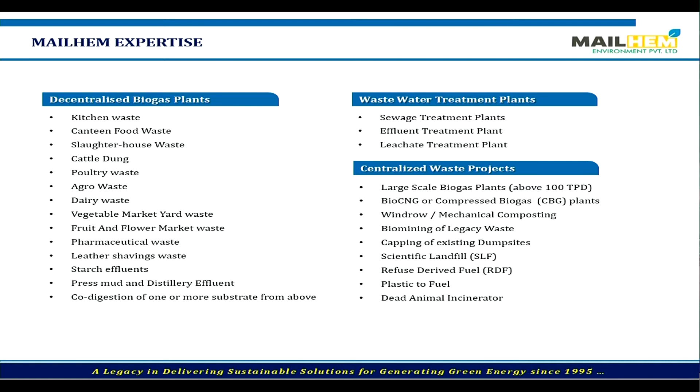Now you can see the topic is about biogas. So we can set up biogas projects in a decentralized fashion on a lot of substrates. I think you name the substrate and I'm sure we have a plant on that particular substrate - dairy, distillery, sugar, starch, vegetable, fruits and market waste - anything, this is very easily done. Not a problem, not a challenge for us.

You might even see leather waste - yes, ladies and gentlemen, even leather waste can be converted into biogas. Then, of course, you have the liquid waste, you have leachate, you have effluents, you have sludge. All this can be converted into biogas. And then we do large-scale biogas projects, more than 100 tons per day.

Then you have composting - there's another method of organic waste management. You have RDF and waste to energy, which is handling your dry waste. So lots of things can be done.

We must have done something right in our last 26 years for Prime Minister Modi to give us the Garbage Guru Award, and some other notable Quality Council of India Award, Lifetime Achievement Award and stuff like that. This one's my favorite - this one was from IBA itself for operational excellence. So that's something which is our specialty, operating the plants. If you don't want to operate a plant, don't build it. That's our logic.

We have more than 350 projects all across India. Now I'm talking about a particular scale. We all know about the municipal ward level, where a population of about 75,000 to 1 lakh is generating a lot of waste.

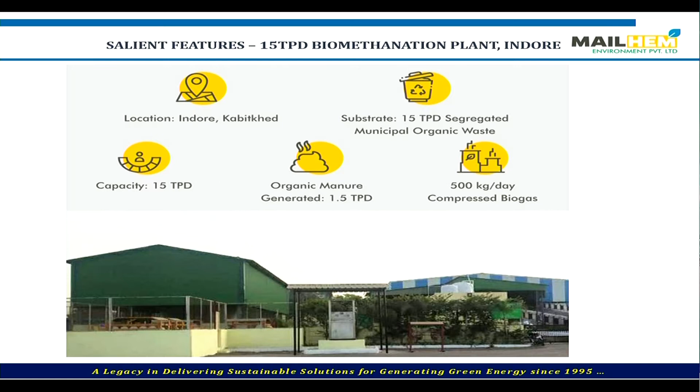So this project, which we did for Indore Smart City, is a mini bio-CNG project with its own dispensing station. It takes care of 15 tons per day of organic municipal waste, which comes at the transfer station. We convert that into biogas, purify it, clean it, convert that into bio-CNG, and we have our own dispensing station where we are able to fill Indore buses.

This project has been in operation for the last 4 years. You're welcome to go and see it - it's your taxes at work. It's a government project, go anytime, no problem. This is in Kabitkhed.

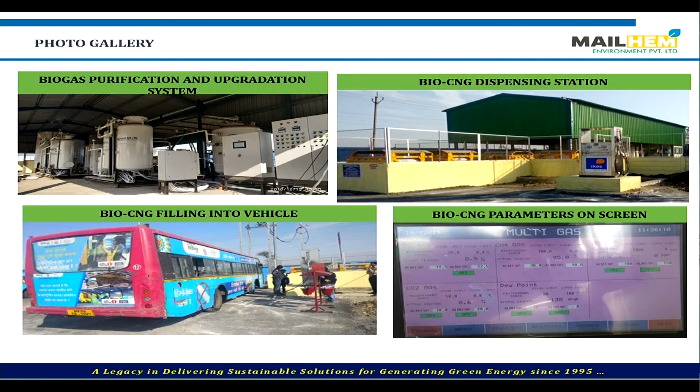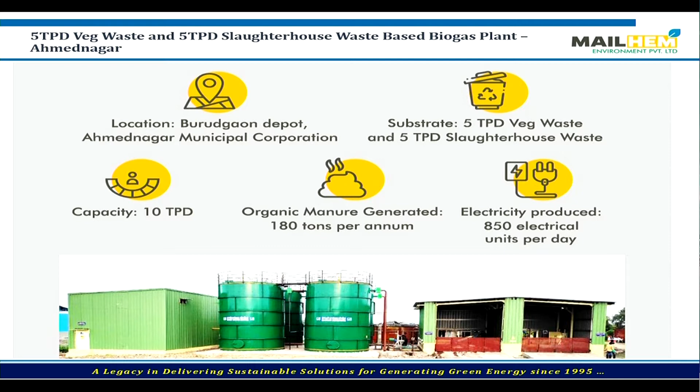Another government project we did addresses a big pain point for all of us - the chicken and mutton shops, slaughterhouse projects, pig slaughter and everything. This creates a major disposal problem for the government. So this is a slaughterhouse waste-based project in Ahmednagar city, where 5 tons of slaughterhouse waste and 5 tons of vegetable waste are combined, treated, converted into biogas, and used for heating and electricity generation at the waste dump yard. It has really improved the aesthetics of the waste dump yard there.

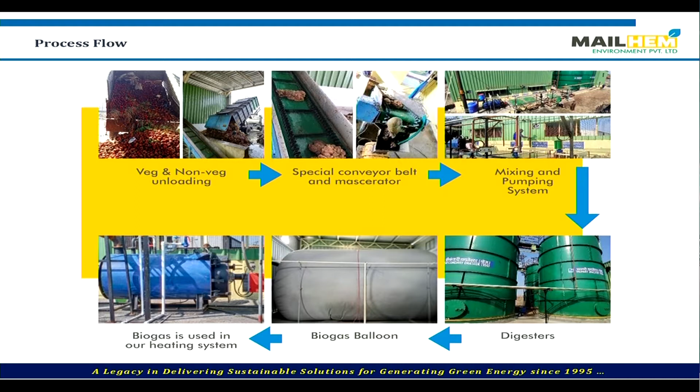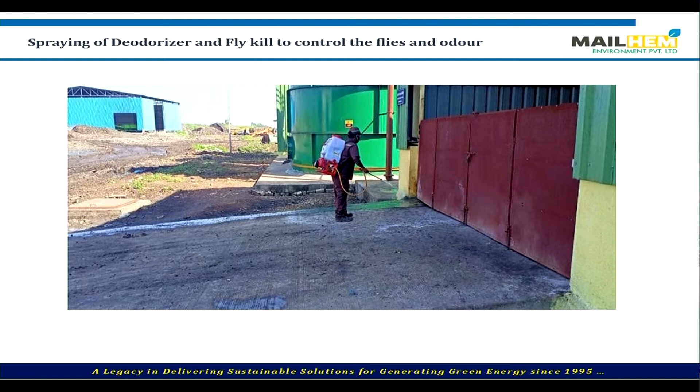Now, what about the smell? Slaughterhouse - I'm talking of blood, paunch contents - oh my God, it can give people a headache. But why biogas? Because once this material gets into the biodigester, there is no smell, there are no flies. And to ensure double precautions, you even have an auto spraying system, as you can see. This project was appreciated even by Central Pollution Control Board officers, who mentioned this is the ideal way to treat this type of waste.

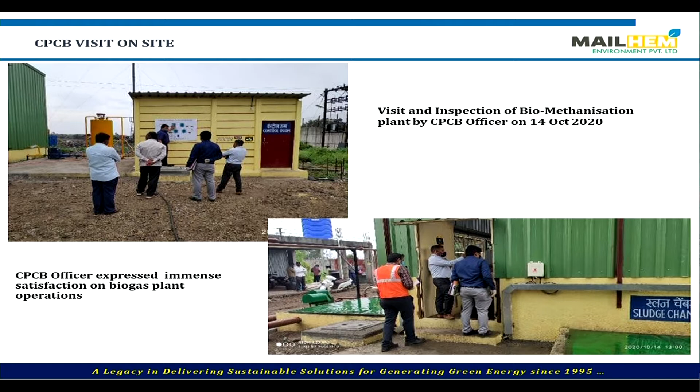So you see, I'm trying to solve government problems at different levels. Stinking wet waste - the smell comes from stinking wet waste at different levels. Once it gets into a biogas plant, it becomes totally eco-friendly. You have a very compact footprint, meaning you're not consuming a lot of space. You get biogas, which as previous speakers mentioned can be converted to cooking fuel, heating, electricity, even bio-CNG these days. And then the liquid fertilizer and solid manure that you get sells very well.

In my 22 years of experience, though we call it a biogas plant - and I'm thankful to Shuklaji for naming it BGFP, biogas fertilizer plant - there is more stress, more importance given to fertilizer than the biogas. We get questions about why the Satat rate should be 46 and why not more, things like this - all okay. But the actual paisa is in the fertilizer, because we are an agro-based economy. So fertilizer is also the way to go.

Don't leave that out. These plants can be semi-automatic or fully automatic. We give a social impact by employing a lot of local people around. If you have a project in Tamil Nadu, you're going to have Tamilian people, local guys operating that plant, and normally we prefer even ladies, self-help groups. That's how you have a social impact for this kind of project.

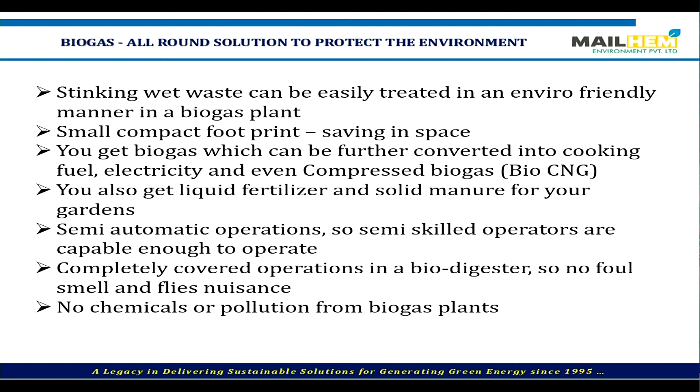At a different scale, when you have to scale up, these are some bigger projects we are doing. This is a project for Rudrapur city, handling city garbage, city waste. Rudrapur has a 50 ton per day compressed biogas project with its own dispensing station and a tie-up with IOCL Adani. So you see, we are doing both, and here city waste gets handled.

A similar project is for Bhopal. Municipal organic fraction of Bhopal city, 200 tons per day from the vegetable market, fruit markets and everything, is getting treated into a CNG project where buses for Bhopal will be filled up at 5 rupees less than the commercial market rate, but not lower than the Satat rate. All these projects are 25 and 30-year projects.

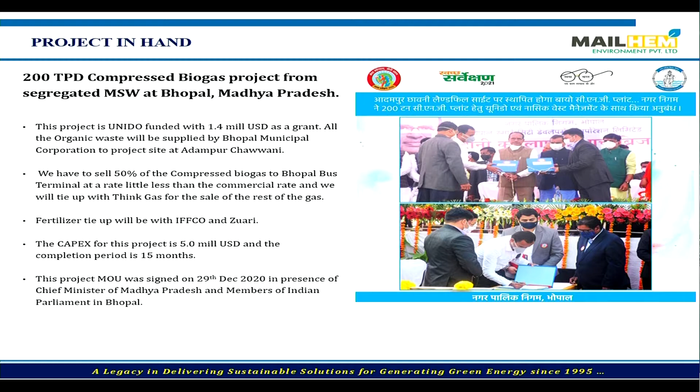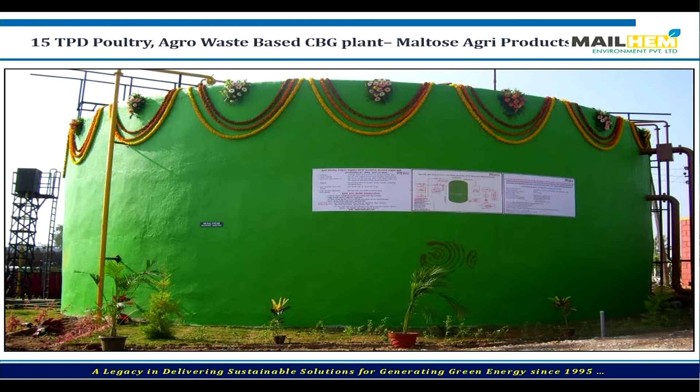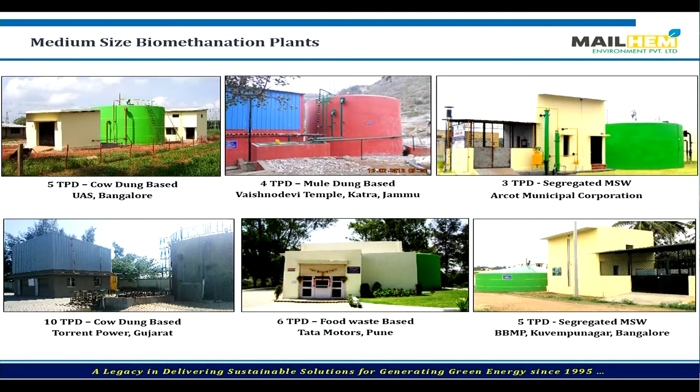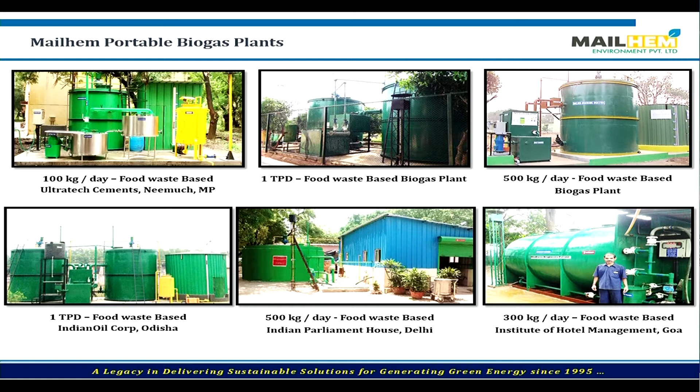So you see different scales - these are agro-based projects, potato and food processing projects, all converting to CNG. This is dairy and poultry combination, pure poultry and egg industries, and some organic fraction of municipal solid waste. You can make it even smaller - this is for housing societies also. So you see, biogas is all encompassing. Thank you so much.

Thanks a lot for giving the insight. I mean, something you need to really notice.

He talked about that if you can't run a biogas plant, rather not put it up. There is a saying that installing a biogas plant is one thing, running it is another. I heard a saying that in the Vedas it's written you don't donate a cow to a poor Brahmin. I was literally confused why you don't do that. The reason is very simple - that guy will not be able to take care of that cow. So in fact you are committing more sin than merit.

Biogas plant, as a matter of fact, it's like a cow's stomach, nothing else, right? A cow, when it burps, it emits almost 250 to 400 liters of biogas every day into the atmosphere. So you need to be very sure from the operation and maintenance point of view. It should not happen that you are creating another negative impact by simply releasing the biogas into the atmosphere because your system is not leak proof. Then again this odor problem will come, what he was talking about.

It has to be properly packed, etc. And odor is something you can definitely take care of, and that's something biogas can really proudly talk about in general.

Thirdly, what I really liked was the fact, and that's what we are always emphasizing, SATAT is giving confidence from the market or investor perspective. If you see the whole value chain, the last part is the market introduction of the gas and the fertilizer. This market introduction part is taken care of by SATAT. SATAT is not doing any favor as such - if you can sell the gas in the open market at a better rate, do that, don't worry about it. SATAT is giving confidence that OMCs are going to buy all your bio-CNG, whatsoever you produce. And that is something that was needed.

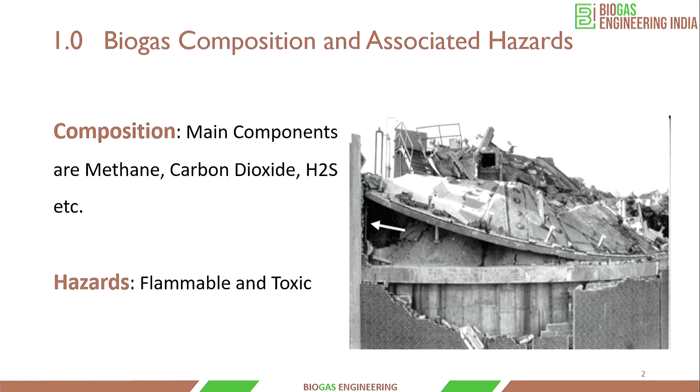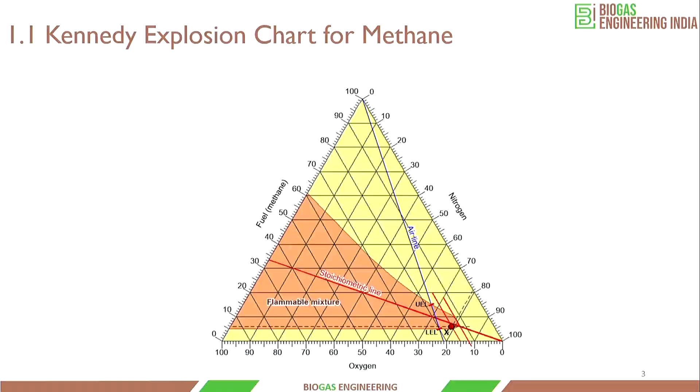To demonstrate that, I'll show you this graph. When methane is present in excess air or exposed to atmosphere, and the concentration is between 5% to 15%, it forms an explosive mixture. So what we are dealing with is an explosive gas, and unfortunately, personally I feel the attention that it needs, the biogas sector, that attention is not there. As we are growing, safety has to be an integrated part of the system. This chart demonstrates that biogas is in a flammable range when leaked, at concentrations between 5 to 15%, which is always available in a biogas plant.

Another aspect is hydrogen sulfide, which is very toxic. I'm not sure how many of you know that, but when the concentration is about 1,000 ppm, it causes instant death. These are some inherent properties of the biogas. Nothing to worry about—if you're dealing with any energy source, these are inherent properties, and they are going to be there.

But there are ways to mitigate that, how to follow good engineering practice to make the difference and provide a safe plant. That's what these properties demonstrate.

Now, what are the facts? Between 2003 to 2009, there have been 13 deaths because of explosion or some kind of exposure. The major causes were explosion, commissioning, material certification, maintenance, and H2S exposure.

So now we know the challenges with biogas, and we know accidents have happened. So what can we do about that? That's where engineering solutions come into the picture. Taking this risk into account, we design a system which is safe and follows all regulation.

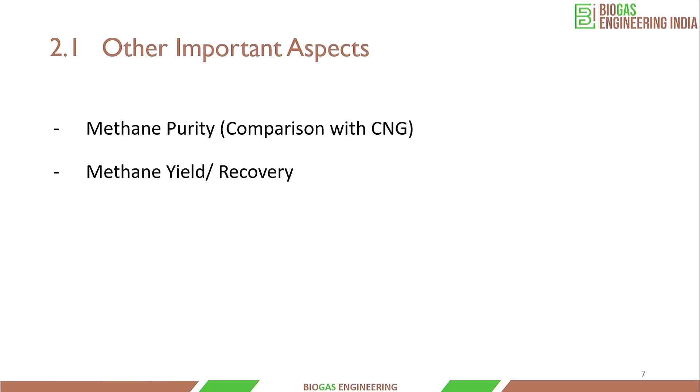Our intention is to replace CNG with biogas. So basically, if we target to meet at least 96%, that's something I feel would be very good, and relatively the consumer won't feel that much difference. That will also make a difference.

Methane recovery—when I say methane recovery, it's about what is the energy content in the feed and how much we are recovering. Since most people are putting so much investment, we should also put a little more effort to extract as much methane as possible to get the maximum energy out of it.

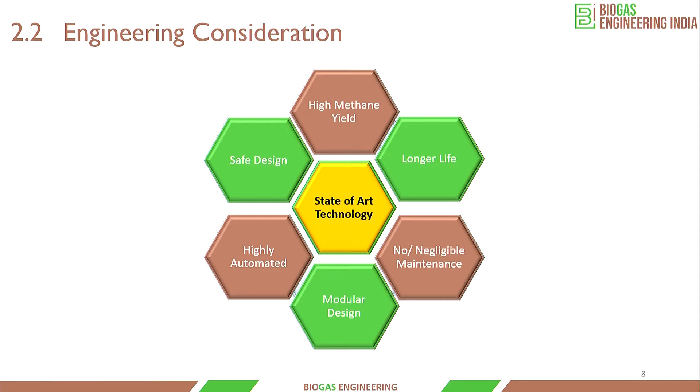Methane has more greenhouse impact compared to carbon dioxide, so capturing as much as possible will also have environmental benefit. In our organization, Biogas Engineering, we believe we should design a system which is safe, easy to operate, and highly maintainable, with maintenance not being an issue, and highly automated. That is our intention, and with that goal we are working towards it.

Regarding my company, we are a USA-based company, and so far we were working on all USA projects. Recently we have started exploring the Indian market, so we are pretty new to it. From the past six months only we have started, but we see great potential and a gap there which we want to fill by applying good engineering practice.

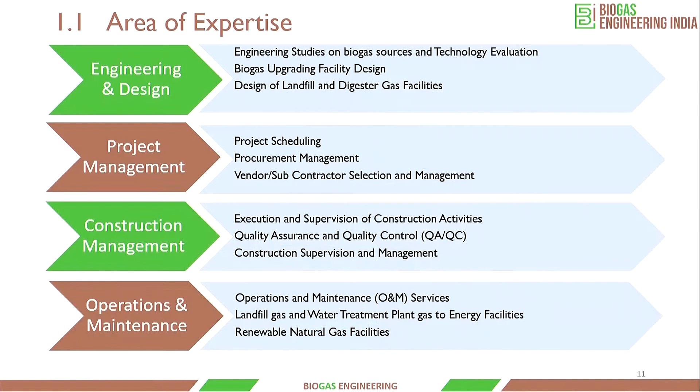A little bit more on when it was established and what services we offer: project management and engineering services as well. I also want to add that the technology we deal with is membrane, and all our projects in the USA are membrane based. In fact, that is the current market trend in USA, that's what we have seen. In India also, we are entering with that technology to provide the best solution, which is safe, highly automated, and provides great methane capturing capability. Thank you, everyone.

Thanks a lot, that was quite insightful. I hope you understand, technically we can scale down any technology, but when you talk about safety, you need to put layers of safety. It's like onion control - if the first layer fails, then the second comes into picture. Of course you need to optimize the layers, but you need the layers. So when you scale down the technology, technically you can do anything, but when you talk about commercial plants, you really can't compromise on safety. Believe me, forget about the biogas plant if you are compromising on safety.

This is one of the personal hesitations I have. I was working for Shell for many years in a refinery in Germany, and I was never allowed to take out my H2S warning system, which was there in my pocket. I had a lot of others as well, but H2S was never allowed. In India, people don't care about H2S, I don't know why. Normally people say, okay, no issue, it smells like rotten egg. But believe me, after a certain level, your nose is also not able to analyze it.

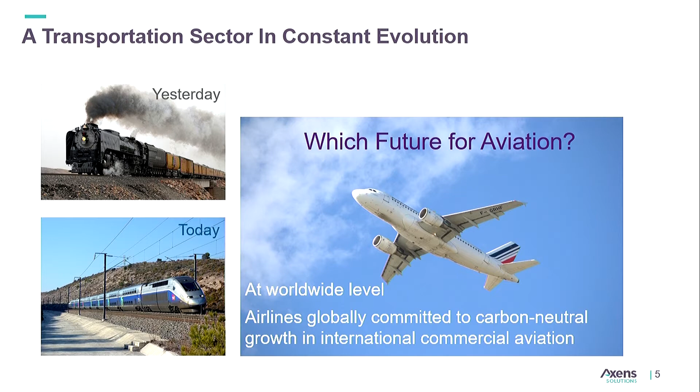Now I'll get to the subject of my presentation, and I'd like to start with this picture. This picture represents how the transportation sector has evolved since the 20th century. Almost all countries in the world were relying on coal-based transportation for trains. Then most countries switched to faster and more reliable electrical-based trains, which are now considered more environmentally friendly compared to coal-based engines.

We all know how these trains have evolved, how the vehicles that we see on the road have evolved. But what about the aviation sector? This aviation sector has been in operation for several decades, but how are they contributing towards the environment, and what are the aviation leaders going to do in future to contribute towards carbon neutrality? We'll speak on this particular subject in my coming slides.

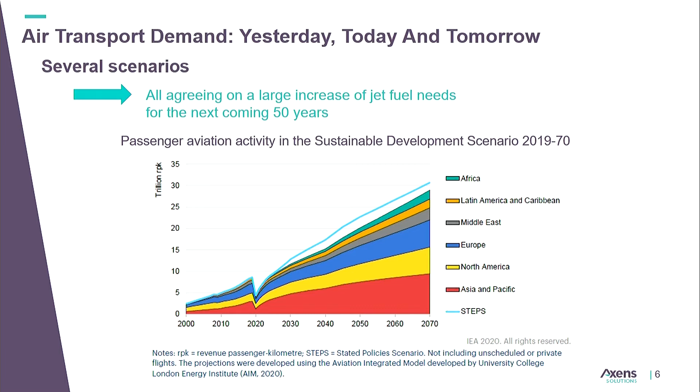The dip that we see in this slide is precisely in 2020, when because of the COVID pandemic the demand of the aviation sector went down. But just after that, the trend is picking up at its expected rate, and by 2070 it is anticipated that the demand of aviation activity would grow by 350%.

Most of the demand is going to come from Asia, the specific region shown in red. So when we're talking about growth in aviation activities, it is certainly going to contribute a lot of greenhouse gases, which are detrimental to the environment. So responsible aviation sector leaders have come out with a vision to move towards carbon neutrality. But how to do that is the challenge. We'll look at upcoming slides on how the aviation sector is planning to contribute towards achieving carbon neutrality.

So there is a vision to achieve carbon neutrality in the aviation sector by following some measures. The two important measures determined are: first, to improve the efficiency of the engines — improving plane efficiency cuts down greenhouse gas emissions. But this is not sufficient; you also have to look for an alternate fuel to further push emissions towards carbon neutrality.

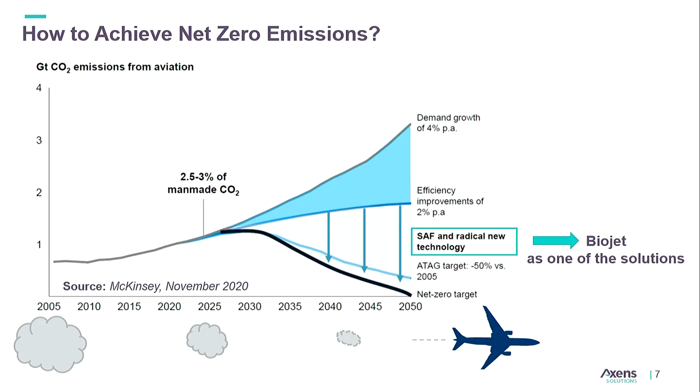That can be done by utilizing an alternate fuel, the sustainable aviation fuel, also known as biojet, that has to replace the conventional fossil-based fuel used in airplanes today. The challenge is that, since this is a relatively new subject, it's easy to say sustainable aviation fuel would help achieve carbon neutrality, but how to produce it, what factors are involved, and how it depends on each region on which technology pathway to choose — that becomes a challenge for aviation leaders.

We will talk about what the HVO route is, to produce the SAF and then blend it into the fossil fuel-based jet fuel. If we talk about European countries, they are also equally committed to follow the same approach, that by 2050 they have to become carbon neutral as far as aviation activity is concerned. If we talk about France, they are planning to have a 50% blend of sustainable aviation fuel in the fossil fuel-based jet fuel that we are using. Similarly, other European countries are also following the same path.

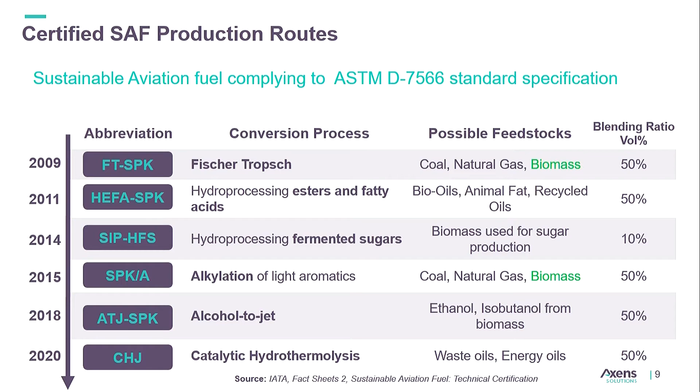For example, in 2009, the Fischer-Tropsch synthesis got recognition to produce biofuel using biomass. Following that, over the period, several technologies evolved. More recently, in 2018, we saw that alcohol-to-jet technology really took charge - it's a technology I'll talk about briefly in my coming slides. Subsequently in 2020, the process of catalytic hydrothermolysis was also recognized by ASTM as a pathway to produce SAF.

Now we've seen that there are several technology pathways to produce SAF, but all these technologies cannot be utilized consistently in all the geographies. There has to be some sort of guidelines, some sort of constraints, to identify the right technology that can be used in a given region.

One major criteria to select which technology would fit in for a given geography is the availability of the feedstock. Because for these bio-based technology pathways, you need to have bio-based feed. It's very simple, but where to get that? Are all the countries in the world having all sorts of feedstocks available so that you can put up any technology? No. So you have to define what feedstocks are available within a given region, and then which of these following technologies can make sense economically as well as commercially.

If we talk about the feedstock availability in India, what we see is that in terms of waste oil, the used cooking oil that we produce domestically or industrially, and residue fats which are generally called lipids, they are approximately 2.5 to 4 million tons of production in India. If we look at the figures of agriculture residue and municipal solid waste, the number is very, very huge - it's like 70 million or 95 million tons per year respectively.

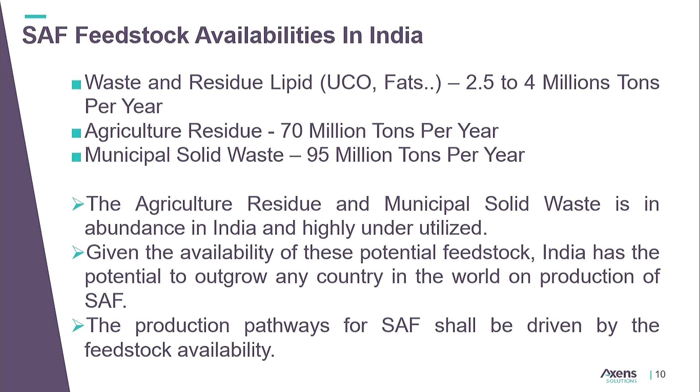So what anybody can conclude is that if India has to take a step towards SAF, the agriculture residue and municipal solid waste is in abundance to produce the SAF. And the UCO route, the waste oil route, is also something which is in significant quantity to be considered for the production of SAF. Given the feedstock availability, we have to choose which technologies would fit for India to develop the sustainable aviation fuel sector.

Now I'll come to the slide specifically talking about the technologies relevant to the feedstocks that are today available, or will be available in future, in India. These three technologies are all licensed by Axens. I'll speak about each one by one, and I'll be as less technical as possible to keep it simple for all of you.

The first route is the HVO route. It's the oil hydrotreatment route, wherein we use the used cooking oil, waste oil, and fats to produce sustainable aviation fuel or even biodiesel if we want.

The second route is BTL, basically biomass to liquid fuel, wherein you can utilize municipal solid waste as well as agriculture waste of any type to produce biofuel. The process is basically gasification of the municipal solid waste and agriculture residue, followed by the Fischer-Tropsch synthesis to distill out the sustainable aviation fuel from the pathway.

The third route is ATJ, alcohol to jet, as we talked about. In this route, we use alcohols, primarily ethanol, to produce jet fuel. How this ethanol can be produced in a green manner: you have technologies to produce second generation bioethanol from biomass using an enzymatic conversion process, and you also have first generation ethanol produced from sugars. Both types of ethanol can be used to produce the biofuel.

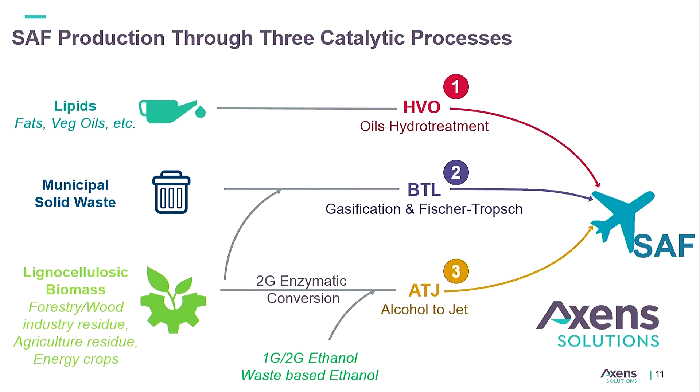In my next slides, I will briefly touch upon what these processes are and how they will change the shape of the world as we see the development of sustainable aviation fuel in India and in the world. I think I'll focus more on the impact, since the technicalities can be figured out here.

In terms of technicalities, the first process is about the conventional hydrotreatment of used cooking oils. We all know the diesel hydrotreater unit, so this unit looks similar, where we are hydroprocessing the cooking oil and fats of any nature to produce the fuel.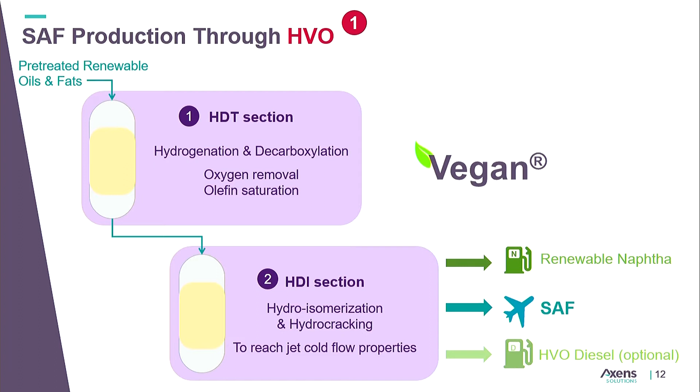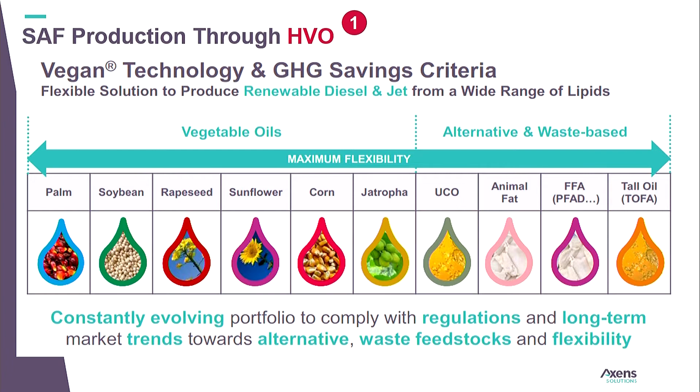This slide talks about the various types of oils and fats that can be utilized to produce biofuel, biodiesel, or sustainable aviation fuel, ranging from vegetable oils to tall oil extracted from trees. In terms of features, this process is very efficient, a very low capex solution, and the fuel produced is a drop-in fuel which can be blended directly into fossil-based jet fuel or fossil-based diesel if we are producing biodiesel.

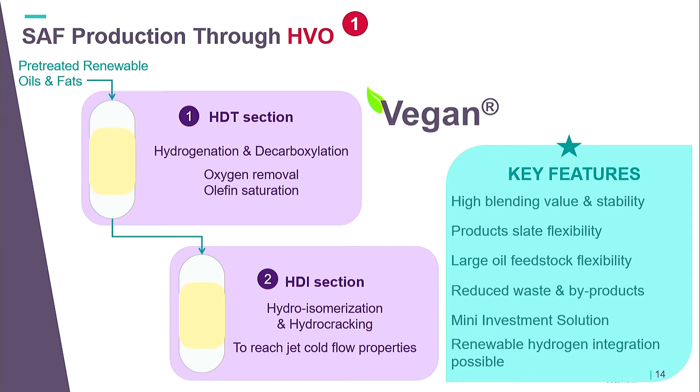The second route is the gasification and Fischer-Tropsch process, in which municipal solid waste and agriculture residue are utilized to produce biofuels. The solution involves the complete pathway, starting from torrefaction of the feed, towards producing syngas from gasification. This syngas is basically a combination of CO and H2, which is then purified by removing impurities and conditioning it, removing CO2, etc., to make it suitable for Fischer-Tropsch synthesis.

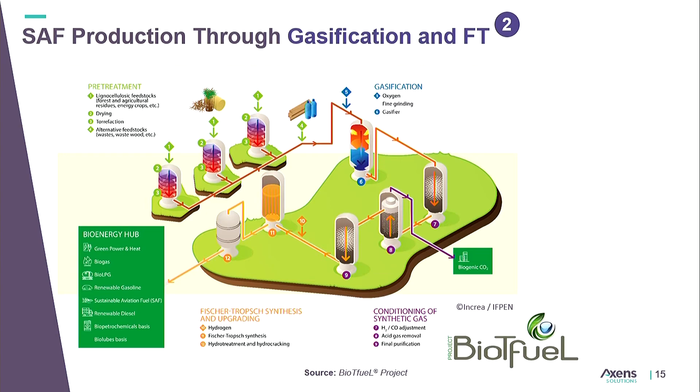In the Fischer-Tropsch synthesis, we convert this CO and H2 into long chain hydrocarbons, which can further be hydrotreated to produce the fuel of the nature one would want, whether biodiesel or sustainable aviation fuel. This technology pathway is very much in place, and all refiners are mostly looking at these kinds of pathways to follow the sustainable aviation route.

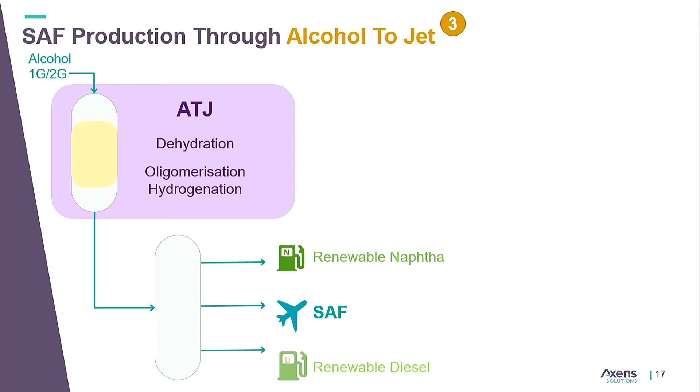The third route, as we talked about, is ATJ, alcohol to jet, in which the alcohol, primarily ethanol, is dehydrated to produce ethylene. This ethylene undergoes an oligomerization process to produce longer chain hydrocarbons that fit the curve of the Jet A1 fuel specification. We need to hydrogenate this product once oligomerized, to take care of cold flow properties and the desired specifications required for jet fuel. The fuel produced from this pathway is also a drop-in fuel that can be directly blended into the system.

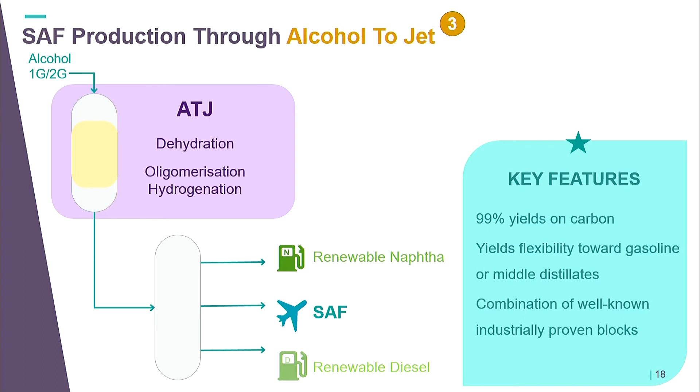Just to conclude, as we are evolving along with the world, India also has to set its steps towards producing sustainable aviation fuel to contribute towards greenhouse gas emission reduction. There are feedstocks available in India which can really help India become one of the global leaders in producing SAF because of the abundance of feedstock available. Axens, as a technology licensor, can help support the refiners and industrialists who would like to look for this kind of route based upon the feedstock availability.

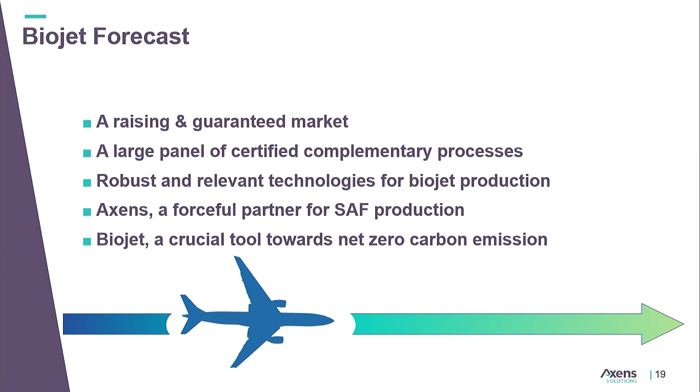We all would have to agree that if we are supporting the cause of carbon neutrality, we'll also have to look at the ground, but we also have to look at the sky, what's happening in the aviation sector, and we have to contribute towards it. Thank you so much.

Thanks a lot, that was quite interesting. I think we are running out of time, but we'll quickly take a couple of questions. Maybe I'll start myself.

As far as jet fuels are concerned, even environmentalists, when you ask them, okay, you are coming to the US all the way from, I don't know, Sweden or anywhere, you are really producing so much CO2 - so everyone will agree that we should go for it. My only question, all the time I am wondering, maybe for myself and for the audience as well, when you talk about this 7566, the specifications are there, I understand, but has this been commercially exploited anywhere in the world?

Maybe you can take it. So I can tell you that the first process we talked about, producing SAF via the HVO route using used cooking oil, this has very much been commercialized. As far as Axens is concerned, we have licensed at least 4 to 5 of these processes to various technologies. And the one unit which is already very much in operation is at La Mede refinery. It's a Total refinery, and they are producing this biofuel, the sustainable aviation fuel, via this route.

Talking about the other pathways, Fischer-Tropsch and the gasification route, they are capex intensive routes for sure. But the thing is that today, in the world, in the US or Europe, there are legislations and regulations that have been put in place, so that refiners and industrialists have to invest in these processes, and they are now starting to look into these pathways also. And when I talked about India today, yeah, there is no particular regulation, but since we are globally connected to the world, and the aviation sector does that, we will have to contribute towards facilitating the availability of sustainable aviation fuel, so that we remain globalized basically. Thank you.